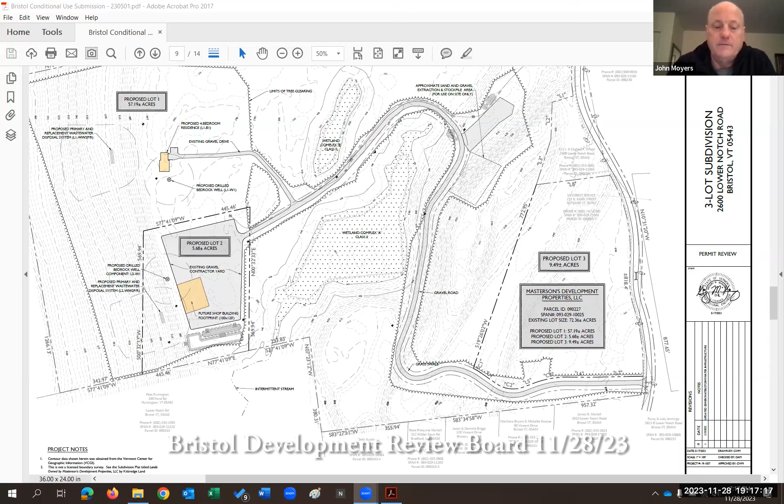So is this a 3 Rod Road? Most of the clearing will actually be within the right of way of the road, but if needed it can extend onto Masterson's property. But not looking south, no.

Well, it's a public highway, there's a town right of way. So you confirmed it's a 3 Rod Road, or are we guessing by default? I haven't confirmed it myself. Okay, that's probably the default. It is. It probably is, but not always.

And did Mr. Dickerson say that 250 feet is, quote, the absolute minimum required for safety? I just want to see if I heard that right. Safe stop distance also, in this case most of the traffic will be exiting and turning right to the south, so really it's the sight distance to the north that we're mostly concerned with.

There's very little traffic turning left and heading north, particularly the heavy vehicles. All the heavy vehicles are going to be traveling south. But did I hear you correctly that 250 feet is the absolute minimum for safety? Yes, thank you. That's the safe stop distance, the absolute minimum, the minimum safe stop distance according to engineering standard. Thank you.

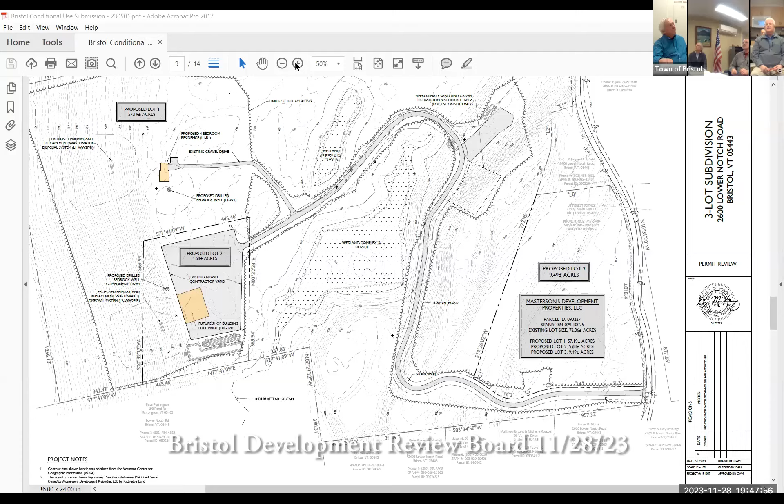But not to the south. I can't, to the north. I believe that we can make that determination, that the clearing required can be accomplished within the town right of way.

So if I'm reading this exhibit right, we've got 818.4 feet of property frontage, and the driveway is pretty darn close to the property line, so you've got more than 390 feet available of property frontage before you get to the northern property line, right?

So whether it's the town right of way or the Masterson land, it's available. Yes. But we don't know that looking south, do we? No, my recollection is that it will be doable, but I can't ascertain that from this exhibit.

226 feet of visibility looking to the south from the driveway, and 150 feet to the north. So testimony from Roger is that 390 feet can be obtained to the north. You need 250 feet for minimum stopping distance, 390 feet for the recommended sight distance. So you need another 24 feet to the south from the driveway for the minimum safe stopping distance.

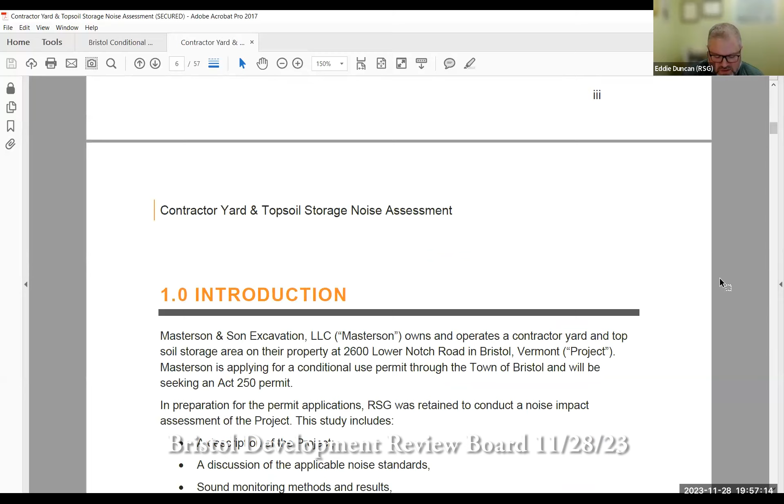Very good. So I'd like to start with section 2 on page 2. If you want to go there, this is a section that provides an overview of the project area and the operations. I'll wait till you get there and then we'll continue. Well, let's stop at this map here on figure 1. This will be a good backdrop for this. So yeah, figure 1 on page 2.

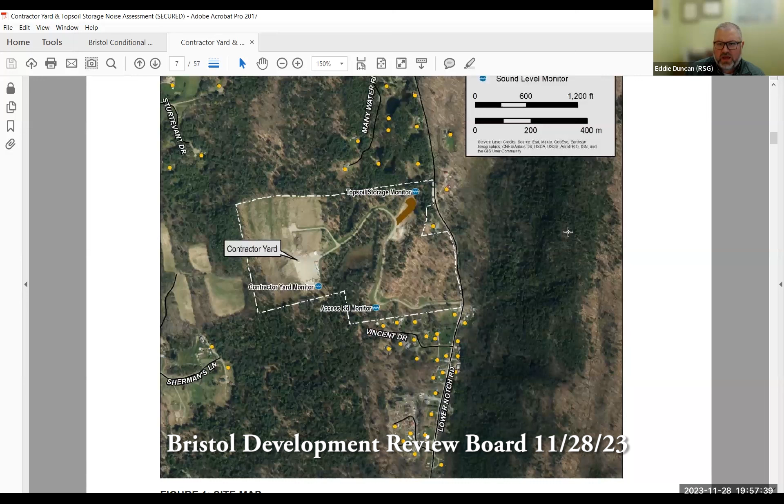So in this figure, we can see the proposed site. We see the property line outlined by the white dash line. We note the location of the contractor yard. The area for topsoil storage is noted by the brown polygon. The access road is clearly visible in the aerial photography.

We also show the location of 3 sound monitors that I'll refer to later in the report. And we can see these orange dots throughout the area — those are all residences identified through the Vermont E911 database, the same residences used in the modeling portion of the study.

So the proposed operation we are considering here in the noise assessment is really 2 separate areas. There's the contractor yard, where the sound is for the most part loading and unloading equipment and vehicles coming and going. In modeling, we modeled just that — vehicles being loaded and unloaded in the contractor yard.

The other part of the proposed operation is the topsoil storage area. It's the same details we had with the traffic study: delivery of approximately 1,000 cubic yards over the period of a few days. As you heard in the traffic testimony, it's a few days over 2 separate weeks during the year. It would also involve processing and screening for approximately a week per year, split between those 2 periods where topsoil is coming in.

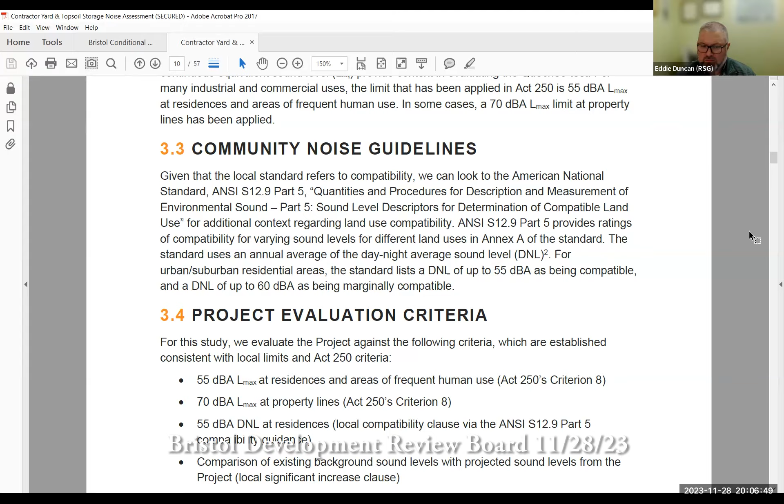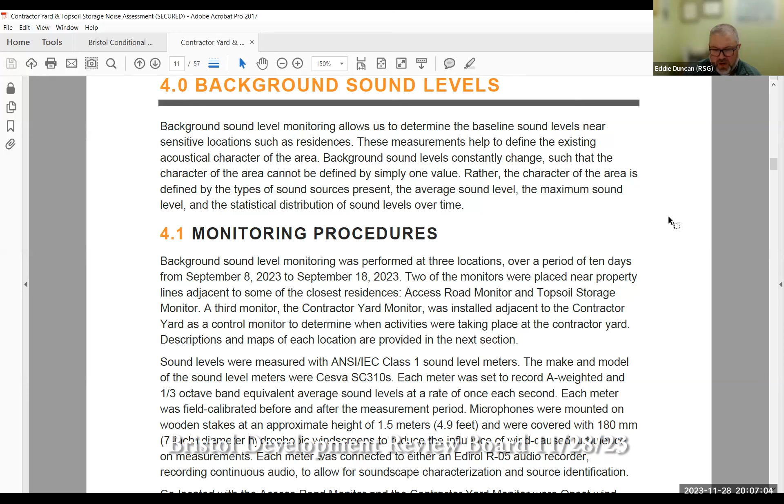So if we could go to section 4, to the monitoring section, we'll talk a little bit about the background sound level monitoring that we did. We conducted approximately 10 days of background sound level monitoring in September of 2023, at 3 locations that we saw on the map in figure 1. Actually, why don't we go back up to the map in figure 1 just to highlight those locations.

Those 3 locations include the topsoil storage monitor, located northeast of the topsoil storage area, between the topsoil storage area and the property line next to the closest residence in that area. Then to the south, there's the access road monitor, located at the corner of the access road just before it turns north on the property, adjacent to the closest property line to the south where the residences are located along Vincent Drive.

And then there's the contractor yard monitor, which is representative of a location set back further from Lower Notch Road than the other two, but it also served as a control monitor. At the time, we weren't sure if there would be activities occurring in the contractor yard or not, but we wanted to make sure that if there were, we were able to quantify that from that monitor to see how it affected the other monitors. We have those three monitors that are reported on in section 4 of the report, so if we could go back down to there.

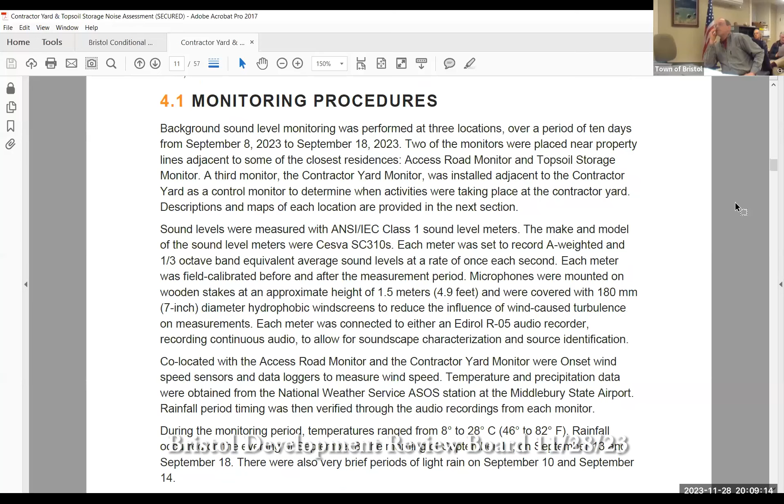Which locations did you measure wind speed? That is at the access road monitor and the contractor yard monitor.

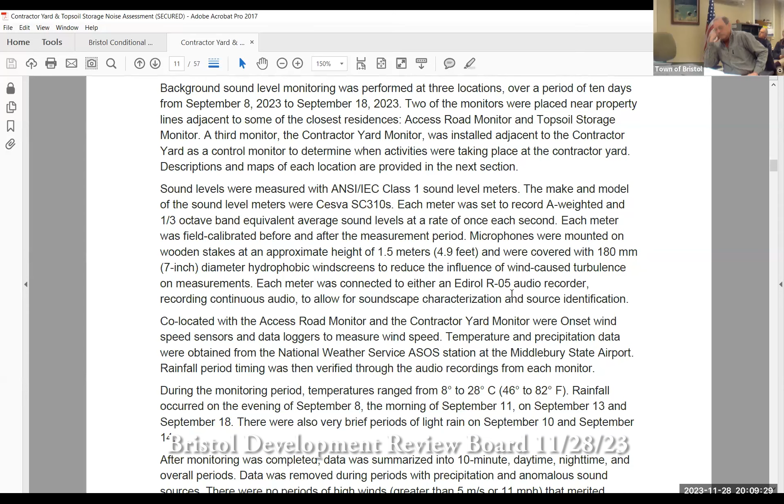Yeah, I see that now in the report. Well, during the monitoring period, we actually ended up not having any periods above 5 meters per second, which is the cutoff for data that should be excluded from the data set. So while we monitored wind speed, it wasn't windy during the monitoring period, so we didn't have to worry about that causing extraneous noise.

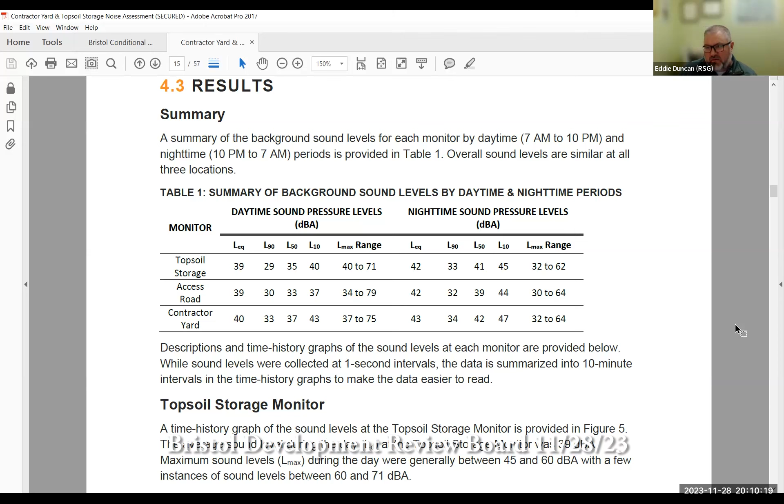So the results are presented in section 4.3 on page 10. It's presented in a few different ways, textually in the paragraphs, but table 1 provides an overall summary of each of those monitors, and we also have a time history graph for each of the monitors. So I'm going to focus on table 1 here, since it's the most easily digestible for all of us.

What we can see from table 1 is that background sound levels are fairly consistent across the entire site. It really doesn't vary that much. You might get a little more sound from vehicle pass-bys down at the access road, and at the topsoil storage monitor where you're closer to Lower Notch Road. But generally speaking, it's very similar across the site. The daytime average sound level was 39 decibels, 40 up at the contractor yard, but you can't hear the difference between 39 and 40. So we're just going to call the background sound level at the site 39.

Eddie, hold up. So this would be a good place, since we have this table in front of us, for you to explain the row of units across the LEQ, L90, L50, L10.

Sure. If anyone wants to take a deeper dive into this in their own time, there's a lot of information in one of the appendices. There's a noise primer, but to give an overview now, the LEQ is the equivalent continuous sound level, which from a layman's perspective you can think of as an average sound level.

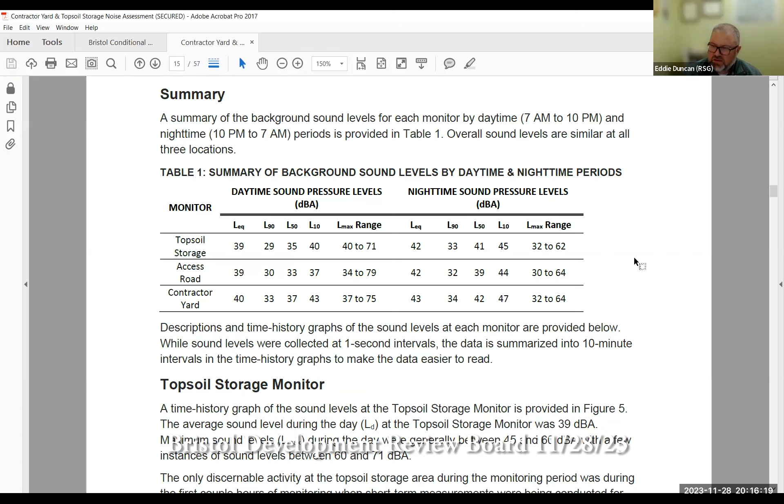So in addition to this background sound level monitoring, we also did tests on the day that we set up the equipment, September 8th. And I think the one that I'd like to highlight here is in the topsoil storage area, the topsoil storage monitor. We had the applicant load and unload material right in that area with a dump truck, a loader, and an excavator operating. And that also included the tailgate hitting on the truck.

And with that, during those operations, the average sound levels at that closest monitor, the topsoil storage monitor, was between 45 and 49 decibels. And the maximum that occurred at that monitor was 63 to 74. And that was due to unloading the material from the dump truck.

So that's the background monitoring. There's more that we could go into if there are questions.

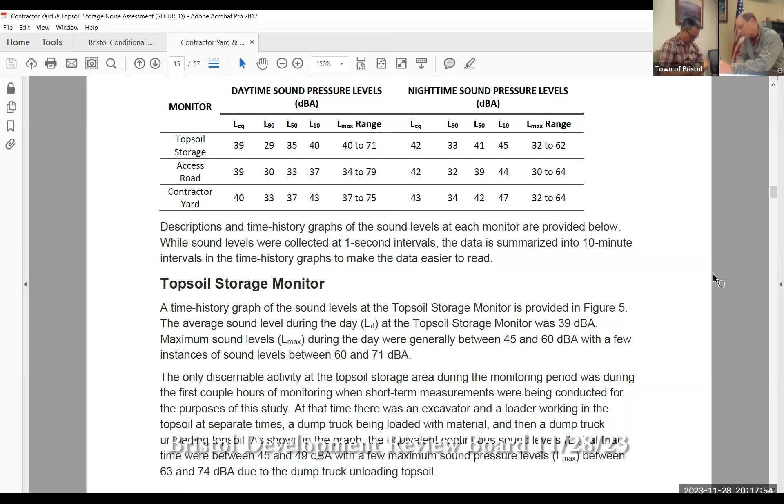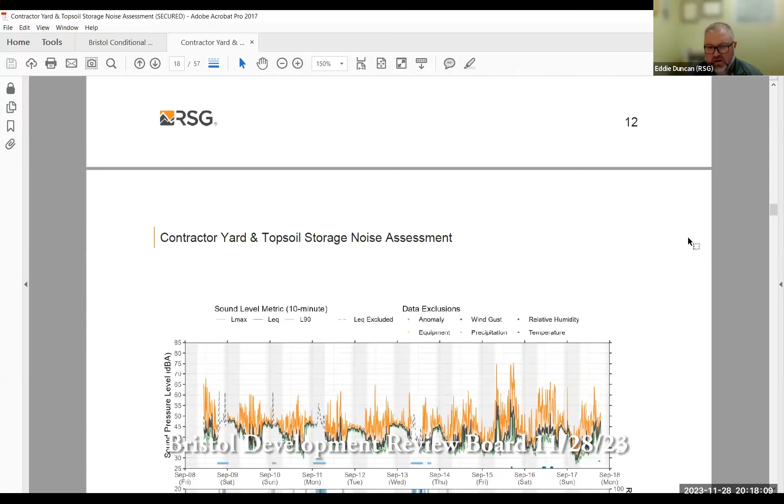So let's go to the following section, section 5. These are time history graphs that we're scrolling past here. So section 5 talks about the projected sound levels from the proposed site. So we took those tests that we did at the site and we quantified the sound emissions of those operations. And then what we're able to do is build a 3-dimensional computer model, and we put those sound emissions into that model.

That computer model uses a software package called CadnaA. The important part about that, though, is that it implements an international standard. The international standard is ISO 9613-2. This is an internationally accepted acoustical model for calculating sound propagation outdoors. It's used across the state by other local boards, Act 250 district commissions, the environmental court, the Supreme Court has even relied upon it, and it's used all around the United States.

And so that's the model that we use to calculate sound emissions and take those sound emissions and essentially propagate or spread them throughout the surrounding area so that we could calculate what the sound level would be at all of the property lines and all of the nearby residences. And so that's what this does. And we did that for a number of scenarios, which are on the next page here.

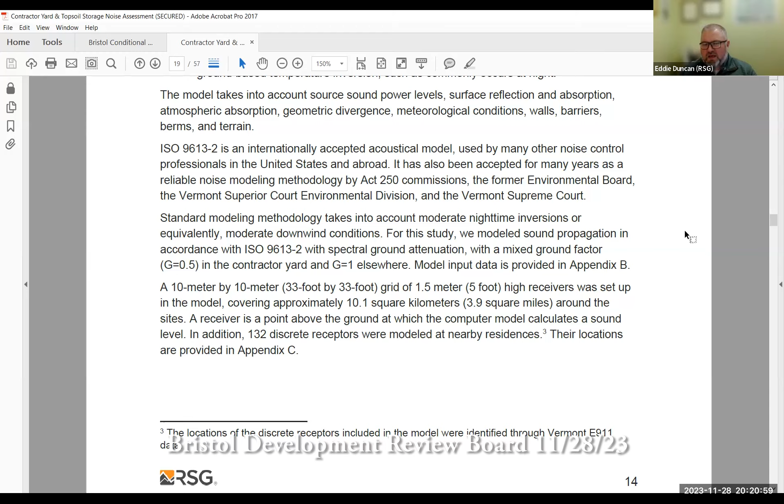There's more model input information provided in Appendix B. What we ended up doing is calculating the sound level throughout the project area over about a 4 square mile area. We included 132 residences in the model, from the Vermont E911 database. We ended up modeling 8 different scenarios, shown here on page 15, section 5.2.

These scenarios are broken down by area. Scenario 1 is up in the contractor yard. Scenarios 2 through 5 are in the topsoil area. And scenarios 6 through 8 are on the access road.

Scenario 1 is unloading and loading of equipment from a trailer in the contractor yard. It's literally the cover photo to the entire report, a tracked excavator coming off of a trailer and then pulling back up onto the trailer. So that's the sound level from scenario 1.

Scenario 2 is unloading a dump truck in the topsoil storage area, which includes using the tailgate to hit the truck bed. The material was topsoil.

Scenario 3 is screening topsoil in the topsoil storage area. Scenario 4 is loading topsoil into a dump truck with a loader at the topsoil storage area. Scenario 5 is the same as scenario 4, except it's using an excavator to do the loading instead of a loader.

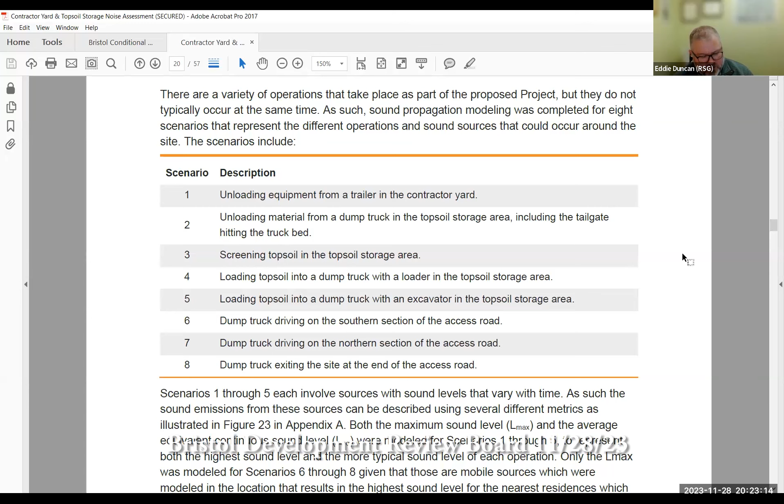So those are the scenarios that we modeled. The results are provided in section 5.3, and we present them in a few different formats. One is map formats that show sound level isolines. Let's look at an example of that real quick on the following page.

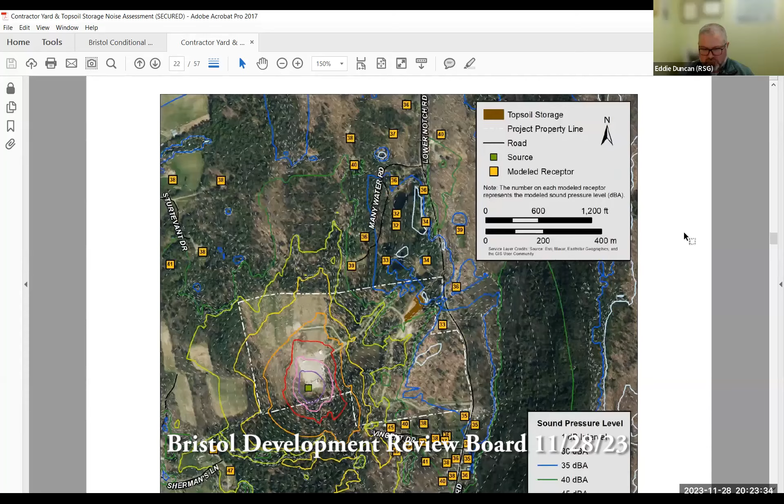So you want figure 8, Eddie? Yes, figure 8. This is just one of multiple maps for each of those scenarios. The colored lines represent sound level, going from dark purple near the source, near the middle of the map, out to dark and light blue colors on the outside of the map. The purple line near the center represents 70 decibels, all the way out to the light blue line on the outside representing 30 decibels.

There are a variety of dashed gray lines on the map, representing 1 decibel intervals. So you can literally look anywhere on the map to see what the sound level is in a certain area. In addition to those lines, we also have orange boxes over top of each of the residential locations, with a number on top of each box. That number is the projected sound level at those locations, so you don't have to figure it out from the ISO lines—you can just look at those boxes.

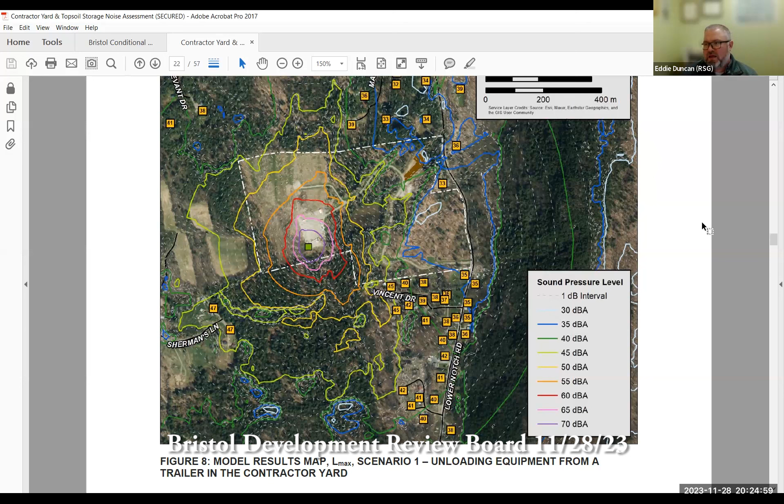For each of these scenarios, we modeled both the maximum sound level, shown here in figure 8, and the LEQ, or average sound level, which is in figure 9 below, and in other figures for other scenarios as well.

So the number in the boxes for the residences—is that L max? It depends on which map you're looking at. In figure 8, the caption says this is the L max, so all of those numbers in the boxes are the maximum sound levels for that scenario, projected at the individual residences.

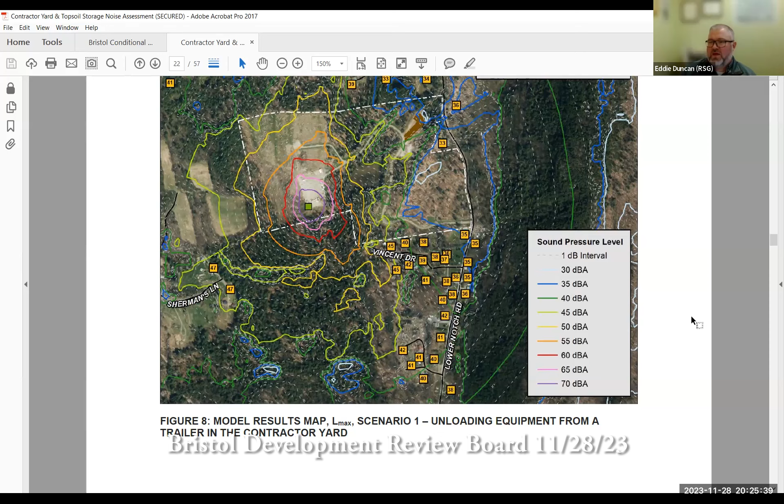And then in figure 9, the caption says that is the LEQ—again, like the average sound level. So the boxes in that map are representing the LEQ, or the average.

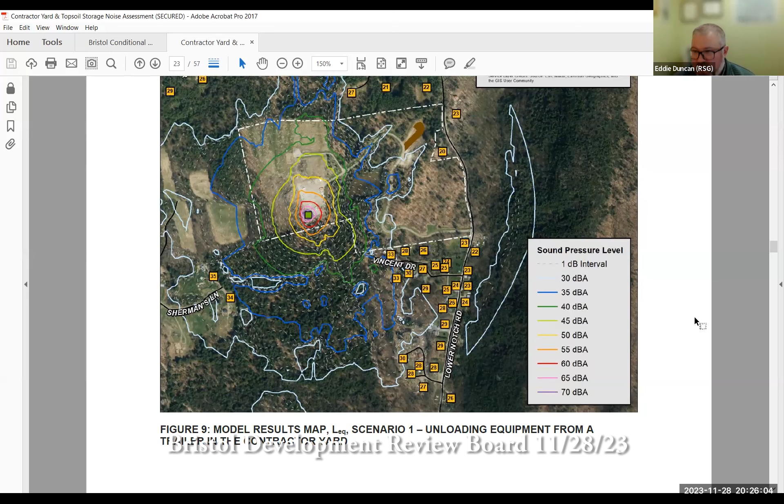In addition to this format for the model results, we also provide all the model results for all scenarios in tabular format in the last appendix of the report, and those can be looked up by street address. So if someone says, I live at 123 Lower Notch Road, you can look up the sound levels at 123 Lower Notch Road for all of these different scenarios.

Okay, so that's Appendix C. That starts on page 48, through 52. Okay, thank you.

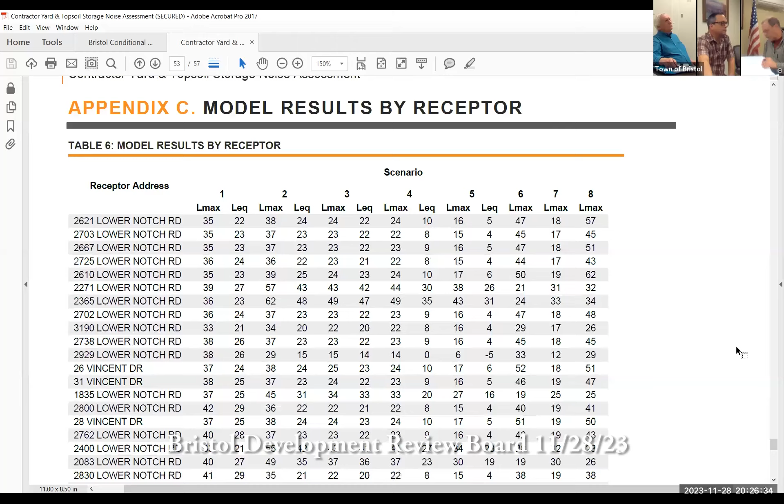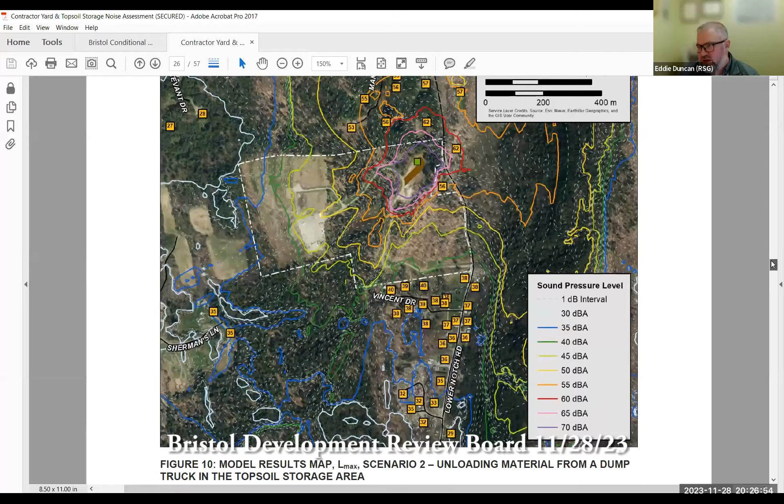So briefly, rather than go through each map, we also provide a textual description for each scenario. What I'd like to do is verbally walk you through each scenario and talk about the highest sound level from each, focusing in on that worst case.

So if we go to scenario 1, on page 16, the highest sound levels occur at Sherman's Lane, which is to the southwest of the site. In that case, the maximum sound level is 47 decibels and the LEQ is 35 decibels.

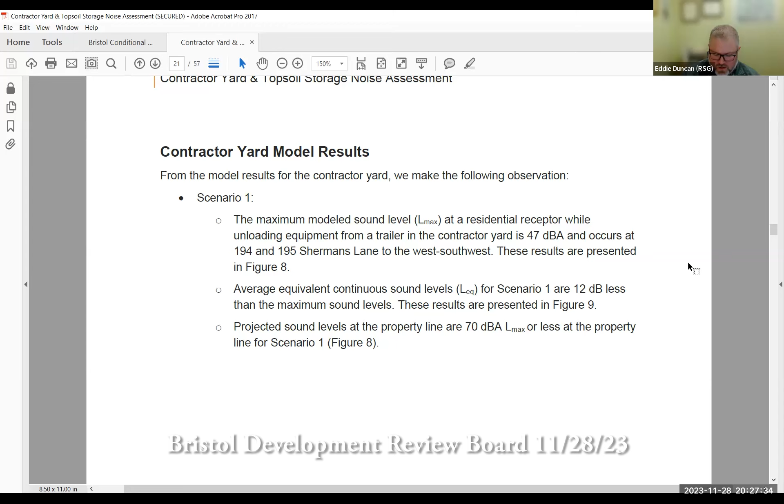For scenario 2, on page 19, which is unloading topsoil in the topsoil storage area, the maximum sound level occurs at two different residences, 2262 and 2365 Lower Notch Road. Those are the closest residences to the north and to the east of the topsoil storage area. In that case, the maximum sound level is 62, and the LEQ, or average sound level during those operations, is 48.

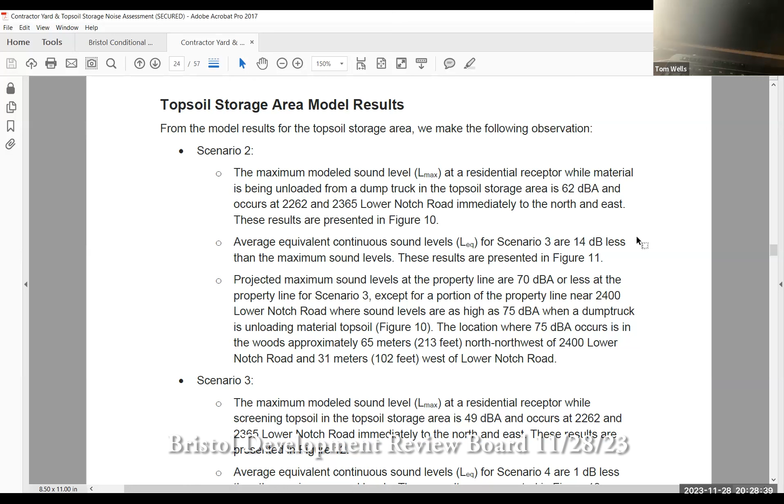Question: did that scenario include the banging of the door when it closes, as I recollect? Yes, it did. So presumably that is the single highest event in the sound. That's correct, that's the loudest source in the model. Got it, thanks, that was my question too.

Scenario 3 is screening in the topsoil storage area, and it happens at the same two residences we just referenced. In this case, the maximum is 49 and the average is 48, because the sound levels from the screener are fairly constant, particularly when you're screening topsoil.

Scenario 4 is loading a dump truck with a loader with topsoil. Again, the highest sound levels occur at those same two residences near the topsoil storage area, and in that case the maximum is 51 and the average is 37.

Scenario 5 is the same as scenario 4, except we're using an excavator to load the dump truck. In that case, the maximum sound level is 44 and the average is 33 at the worst case location, which again is 2262 Lower Notch Road.

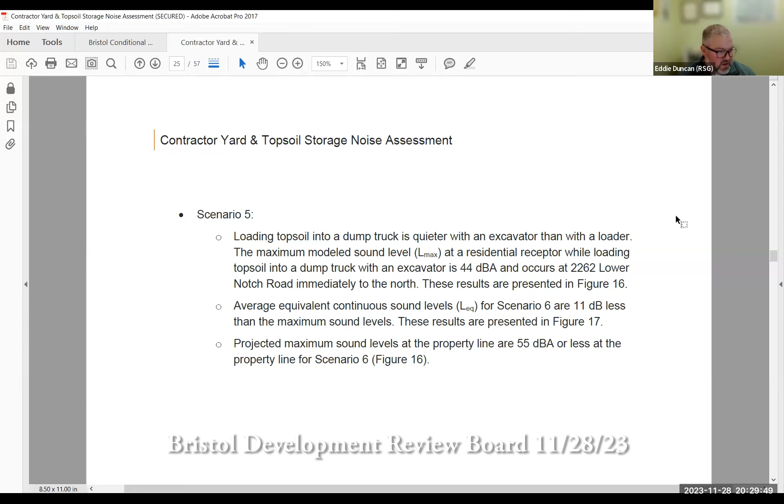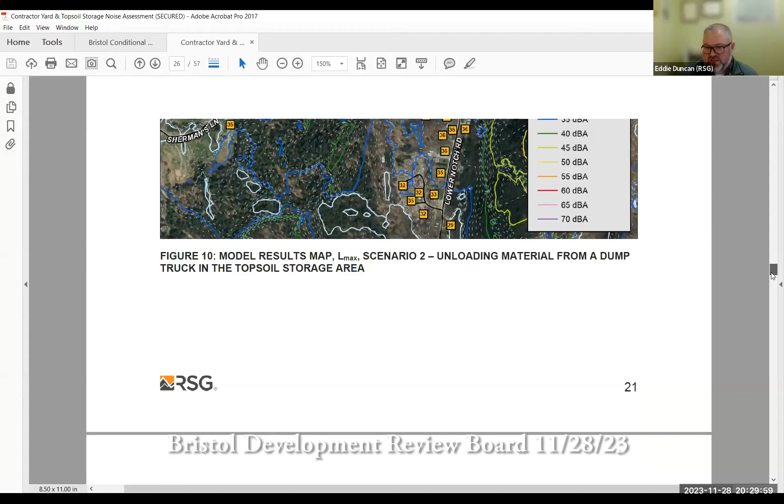If we scroll down to page 29, we have scenarios 6, 7, and 8, which are the truck on the access road. The truck is modeled at the worst case locations for the respective closest residences, so we don't have the LEQ or average sound level, just the maximum shown here. The maximum sound level when a truck is on the southern access drive is at 98 Vincent Drive, at 61 decibels. For scenario 7, when a truck is on the northern section of the road heading up to the contractor yard, the maximum sound level would occur at 308 Many Waters Road, at 43 decibels. For scenario 8, when a truck is pulling out onto Lower Notch Road, the highest sound level occurs at 2610 Lower Notch Road, at 62 decibels.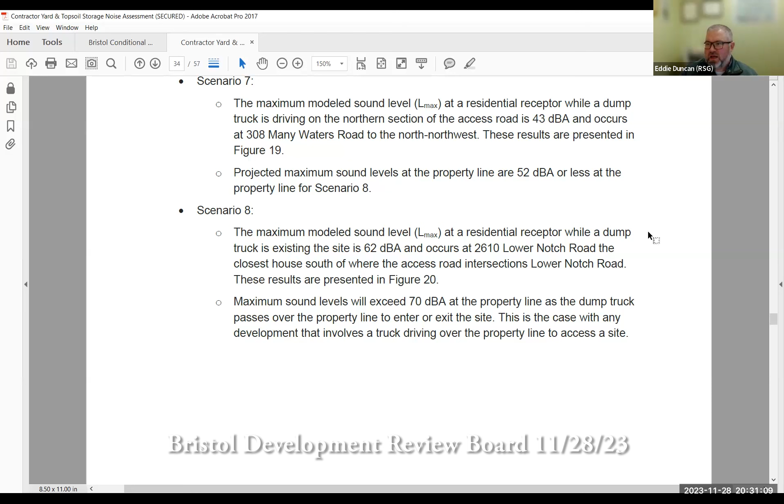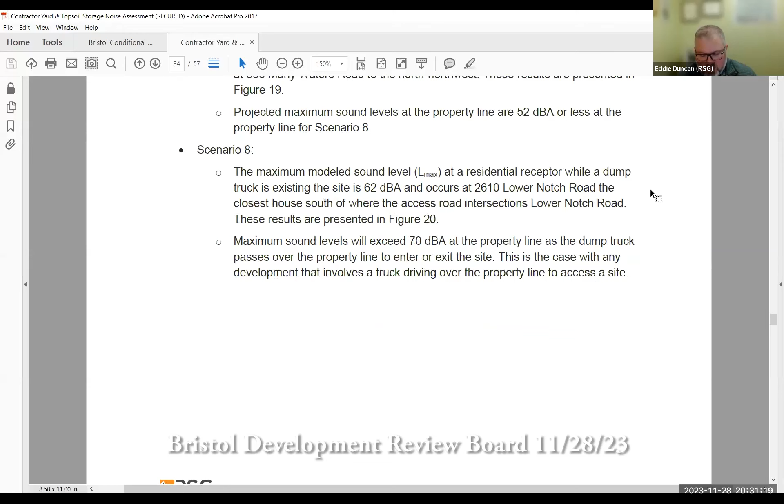So those are the maximum and average sound levels from these various scenarios. What we did then is take those results and calculate the day-night level so we have something to compare to that ANSI standard we were talking about earlier. We also calculated the existing day-night level without the operation, so we could compare the existing DNL to the potential future DNL. On pages 32 and 33 we talk about this analysis.

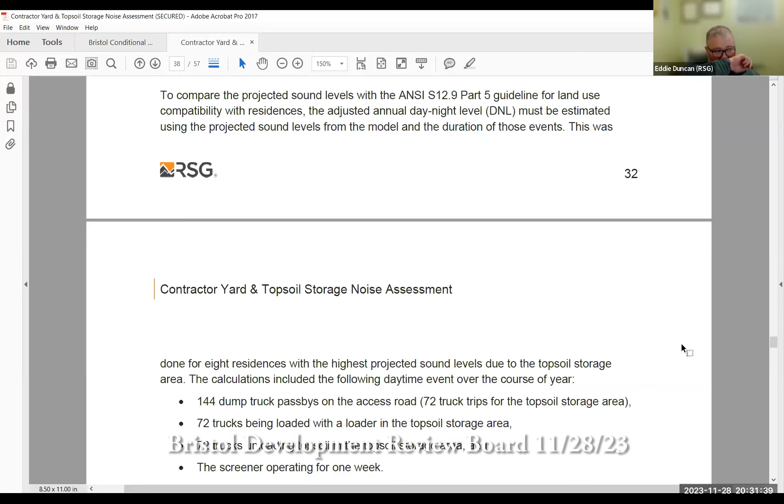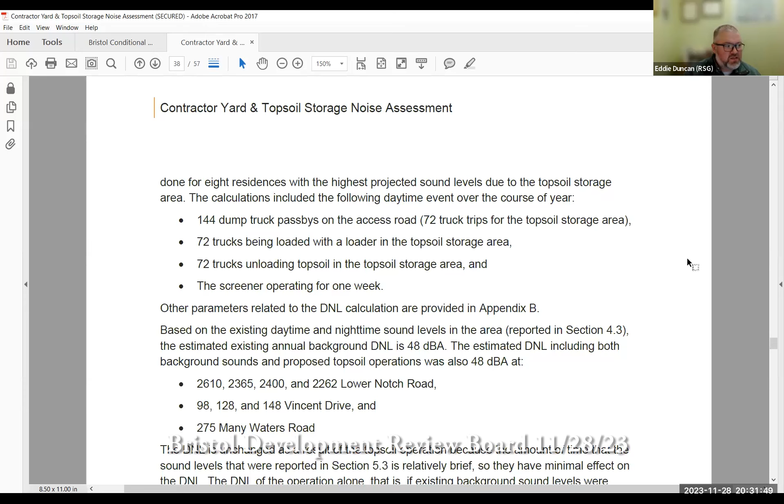And this includes 72 truck trips to the storage area, 72 trucks being loaded with material, 72 trucks being unloaded with material, and a screener operating for one week. With all of that operating, the future DNL was 48 decibels, but the existing DNL is 48 as well.

What this shows is that the DNL doesn't actually change as a result of the operation. The reason for that is the infrequency of the events at the site. Much of the time, much of the year, it's just a storage area for topsoil. So when we take into account these times of heavier usage, it doesn't change the DNL, because those are only occurring fairly infrequently relative to the time period over which the DNL is calculated.

In fact, the DNL of just the operation itself, if we ignore background sound levels, is between 10 and 28 decibels. That's for the loading and unloading of the trucks, the truck pass-bys, the loading, the unloading, and the screener. If we take all of that into account, the annual DNL, which is what the ANSI standard uses, of just the operation is 10 to 28 decibels.

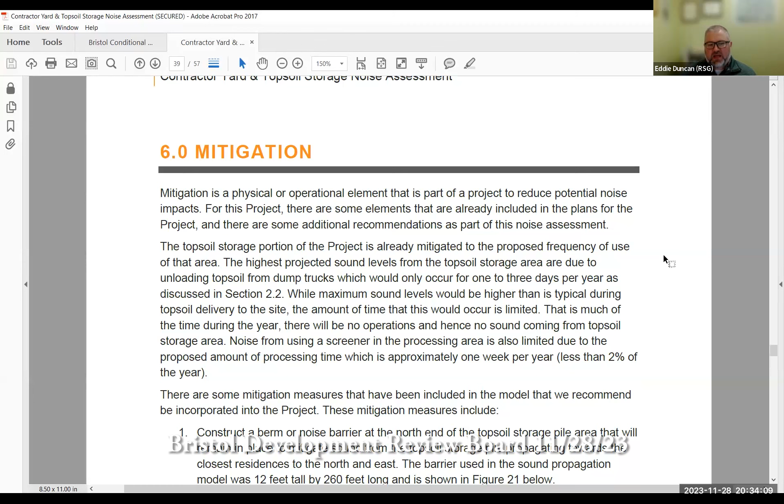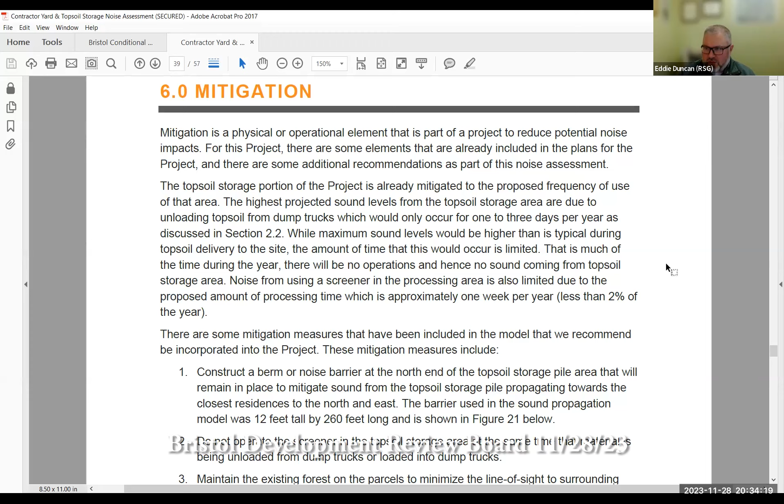I'd like to go to the next section, which is section 6, and that is mitigation. We have a number of mitigation recommendations that are listed here, and we also talk about the mitigation that's incorporated into the project. I'm not going to go through each one, but I'm going to highlight some of the key ones here.

The first is what's already essentially incorporated into the project, and that is the proposed frequency of use at the site is relatively low. Granted, on those maximum days that we talked about earlier during the traffic study, it could be more intensive on those days, but outside of those days, the actual frequency of use at the site is relatively low, which mitigates the sound levels throughout the year.

We also have recommended that a berm or noise barrier be constructed at the north end of the topsoil storage pile area. We give details in item 1 on page 33 here about that noise barrier. It's also shown in figure 21 on the following page. That will help reduce sound levels to the north and to the east.

Two more mitigation measures. Mr. Duncan, do you have any sense of, when you say help reduce it, how many decibels it will reduce it, or any sense of quantifying that?

Well, it's quantified in the noise model. So the results that we've been talking about incorporate that berm barrier into the model. So the numbers, you don't have to do the math, the math's already been done. But which table do we look at to see the model effect of the berm?

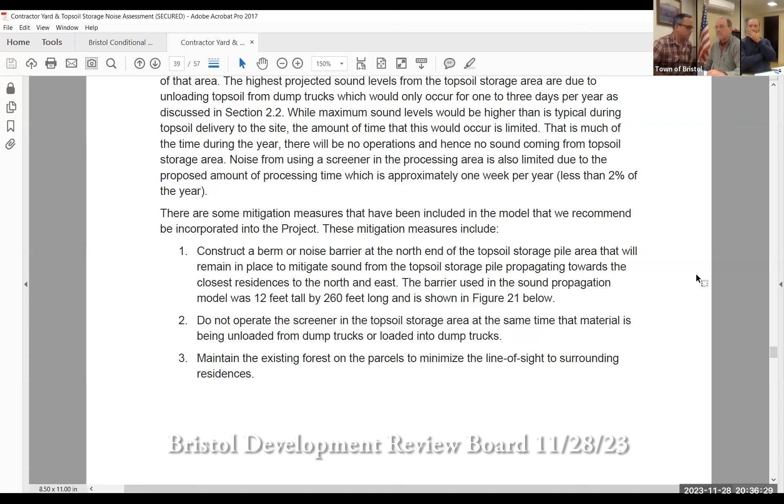We've also said to prevent simultaneous operation of the screener while loading and unloading material. So we understand that the screening may happen in similar time periods to the unloading of material, but we've recommended that the screener not be actively operating during unloading and loading.

So those sound levels from those two operations would not be additive. I want to jump back to the barrier berm a bit. What material were you considering that to be composed out of? And then what's the cover? Is it seeded, grassed? Is it just sand and rock, or what?

Yeah, so it just has to be an earthen berm. It could be rock that's going to stay there and not be moved, it could be a seeded earthen berm. From a noise standpoint, if it's blocking that line of sight up to the 12 feet that we've talked about, it will effectively act the same. Where we might have a little more specification is if we're talking about a noise barrier. So an earthen berm will mitigate it, whether it's made of rock or whether it's made of grass and soil, that type of thing. If we're talking about a noise barrier, the specification would be that the noise barrier weigh at least 4 pounds per square foot. That's a surface weight.

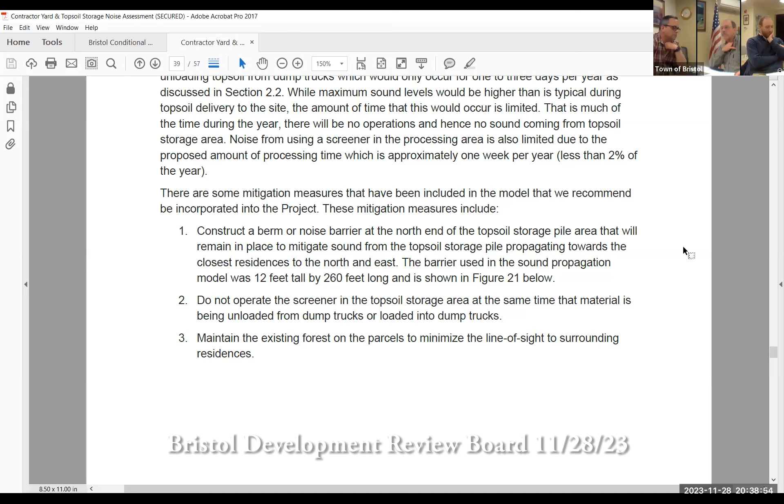And it could be a combination of the two. You could have a 10-foot high berm and then a 2-foot high wall that goes along the berm. That would be just as effective. Aren't we always talking about the berm as a noise barrier here? Yes, but when we're talking about it, a berm and a barrier have the same effect from a noise standpoint. Typically when we talk about a barrier, we mean a wall or concrete blocks, while the berm has a wider footprint because it's made of earthen material. But the effect is the same on the model. Yep, got it.

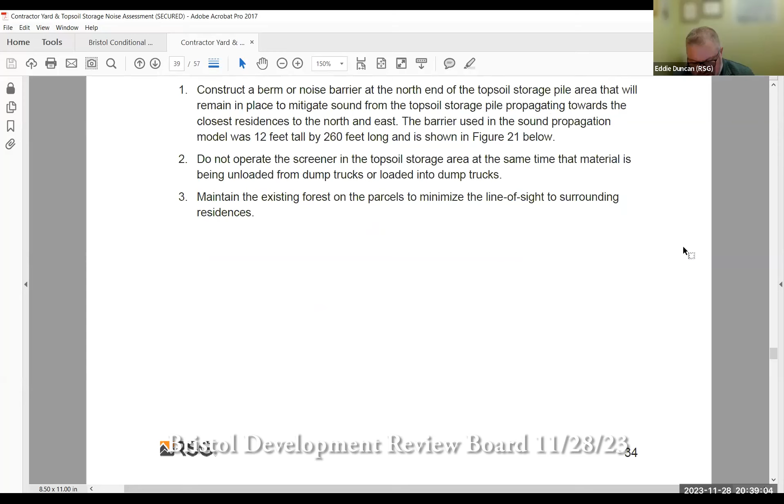And then the last mitigation measure. I have a quick question. If it's the berm we're talking about, as opposed to a separate barrier, would the berm be 12 feet tall by 260 feet long? Yes, the berm would be 12 feet tall and 260 feet long.

And how wide across does a 12-foot berm have to be to stand up? What's its base width? I think it would have to be engineered. That can vary, so it depends on what would come from the engineering for that. It could be a 2-to-1 ratio, it could be a 3-to-1 ratio. That's from a noise standpoint, that's not for me to make that call. Thank you.

No, I would estimate probably 25 feet wide, with a 2-on-1 slope. So it's pointy at the top, not flat. That would figure just a 1 foot flat area if you did a 2-on-1 slope.

That sounds like a whole separate impact. That's quite a large structure. It has visual impact too, and construction impact. I don't see, is that part of this application now? Well, when this area was cleared, Josh pushed, when he stumped the property, a lot of this material was moved into the area where this berm is proposed. I don't have measurements on what's out there currently, but I would guess not much more has to be done to construct a berm to these specifications.

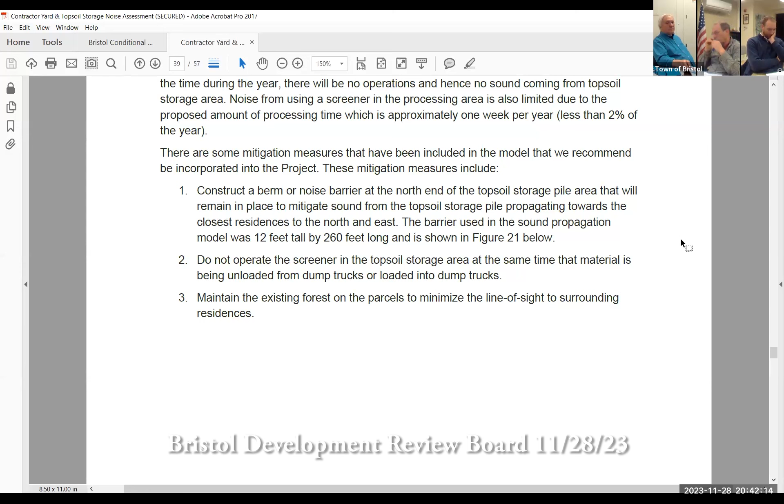So there are a number of other mitigation measures here that I'm happy to answer questions about, but a lot of them are just fairly standard things, like maintaining the existing forest on the parcel to help block line of sight, things of that nature.

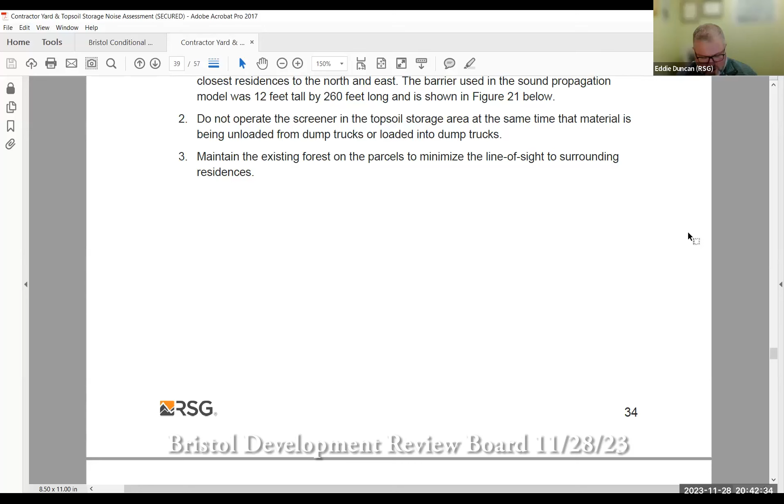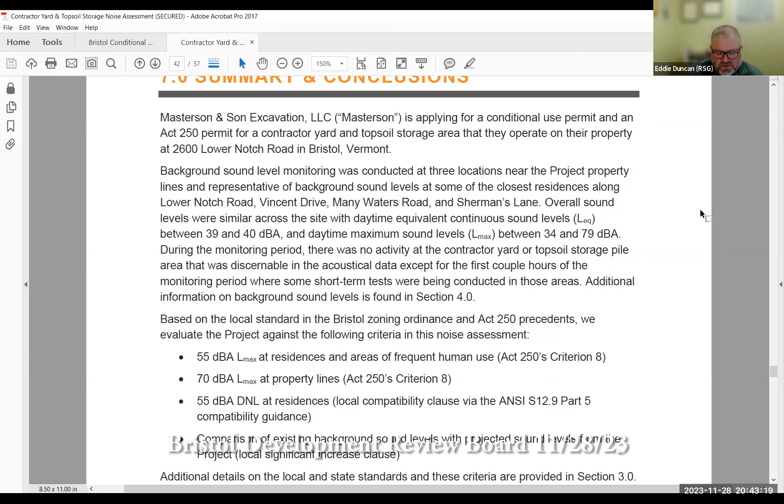So if we could go to the next section, section 7, we get to our conclusions. I think the key things to highlight here are that on average, parts of the operation like loading and unloading equipment and loading topsoil in trucks produce sound levels comparable to existing daytime sound levels. Those sources are relatively not loud. It's activities that cause higher sound levels, such as screening and unloading topsoil, that are on average 9 decibels higher than existing sound levels, with maximum sound levels similar to other maximums that occur at the site, but occurring with greater frequency during the shorter time frame that those events happen.

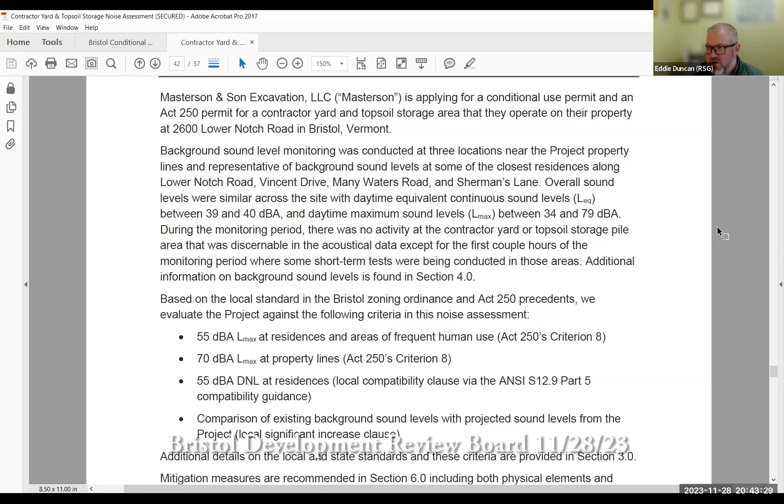And then finally, the DNL, which we talked about, remains unchanged. It's 48 now, and it's 48 with the proposed operation, because of the infrequency of those operations.

And that's what I have for a direct presentation, but I'm happy to answer any questions about what's in the noise study here. Okay, thanks, Eddie.

Let's start with questions from the board, if any, for Eddie. Yep, and then I have one.

I know I'm focused on one little item, but since it is the single loudest sound that comes off the site, as a noise expert, or maybe it's really a trucking expert, is there any way to mitigate the sound of the dump truck tailgate closing, it coming back down? You don't have a damper or anything that's available, correct?

Josh says no. Oh, tailgate's tailgate. Yeah, no, I get it. I'm no kind of expert on tailgates, and I wondered if there was any way to mitigate that, to prevent that from happening, since that is the one time when you're starting, you create some fairly loud sound off site.

The best way to mitigate it is to control the level at which it's hitting the truck bed. Now, if you've got dry material, it would not need to hit the truck bed as hard because it would come out of the truck bed a little more easily. If you have wet material, then it needs to hit a little harder in order to get material from the truck.

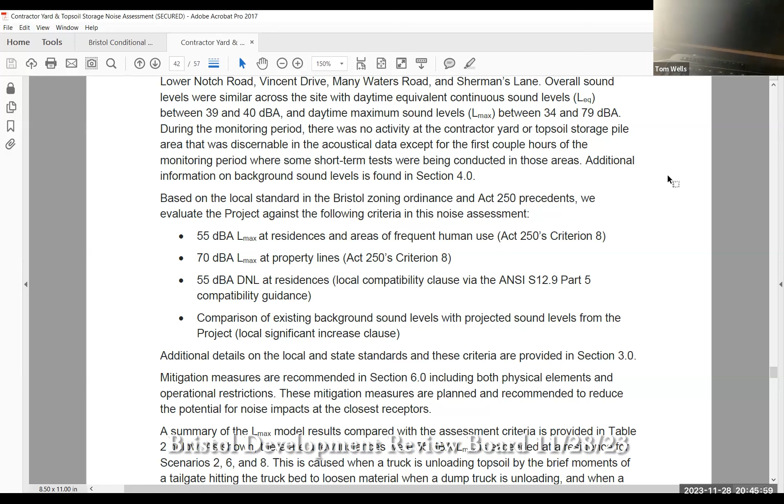Yep. Any other questions from the board? John? Yeah, did you take into account backup beepers in any of your analysis? Yeah, there were backup beepers occurring during the tests we were doing. Generally, the backup beepers are quieter than those other sources that we're modeling. So the loading of material into the dump truck and also unloading material from a dump truck, those are louder sources. So we're focusing on those louder sources.

We do, however, recommend in the mitigation section above that alternative backup alarms be used for the on-site equipment. So a loader and an excavator, that they be outfitted with - there's a variety of options, but one example would be a broadband backup alarm that makes a sound like white noise, like shh, shh, as opposed to a pure tone.

We've had testimony that those are not applicable to lots of kinds of equipment. Is that your experience? Or are they widely applicable to any equipment? I've seen them used on excavators and loaders throughout the state. I can't say specifically to the excavators and loaders here, but they're fairly standard.

I would imagine that it's a fairly easy switch out. Do you have any guidance to give us on that part, Josh?

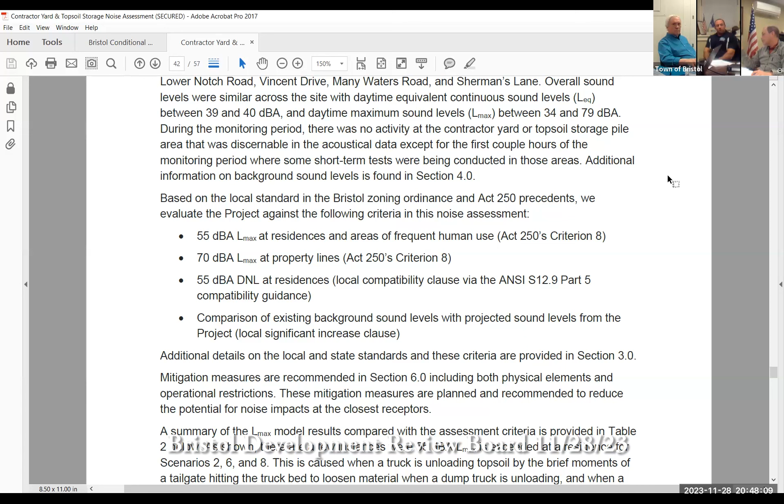In the application, the applicant noted they were installing essentially a kill switch or something like that for backup beepers, but that's not really OSHA qualified, is it? You can't really do that. Is that correct? Correct. Thank you.

This is a comment, not so much for the expert. Thank you for running through all that. It's a lot of numbers, and these sound noise models and stuff are a little numbing to the layperson like myself, but I hear all the numbers, the monitor reports and the test reports. But I see the words in our zoning regulations - significant increase and incompatible. After all this testimony we've heard, I've heard a lot of testimony from neighbors who have heard noises that they considered to represent both significant increase and incompatible with their established use of the areas. I just note that for context.

Thanks. Any other questions from the board? Okay, Jim, do you have some questions? I have a lot of questions.

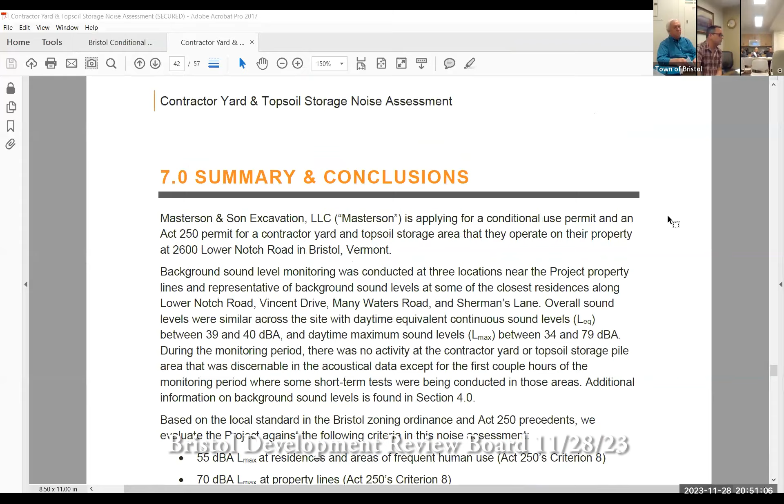So I'd like to start with page 44 of your report, Eddie. Would you like this on the screen as we go along, Mr. Dumont? Sure, it's helpful. Page 44, you said? Yes. There we go, bottom half of the page, bottom paragraph, midway through it. This discussion is about

sound levels from multiple sources. And the bottom paragraph says, in the middle, that the loudest source in any situation always dominates the total sound level. You see that? Yes, it's the first... third. Got it, I got it now.

So Eddie, if background noise, pre-existing background noise, is louder than the new noise, say, of Mr. Masterson's operation, the background noise will dominate the new noise, right?

No, so you read that sentence out of context. If we could fill that context in, that would inform the discussion a little bit. Okay, but I'll explain. That sentence is referring to the previous sentence, which says if two sound sources differ individually by 10 decibels, then the louder of those two is generating 10 times more sound. This means that the loudest source in any situation dominates the total sound level. So I think you have to take that second sentence in the context of two sources where one is around 10 decibels louder than another.

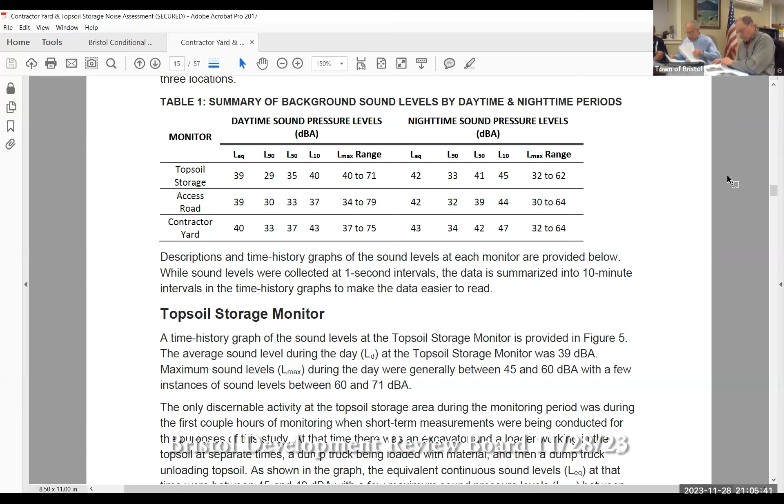All right, well, let's go to figure 9 on page 18. Bearing in mind that the background is 39 or 40, figure 9, page 18, the yellow line is 50 and the orange line is 55 decibels, right? Yes, that's correct. And outside the property line, we've got LEQ of 55 and 50, correct?

That's correct. And that's more than 10 LEQ above 39, is it not? So in the middle of this forest that you're referring to, it is more than 10. At all residences, it is less than 10. I didn't ask you about residences, I'm asking about property. Who owns the property that will be affected, that'll be 55 dBA, which is more than twice as loud as background? I don't know.

No, it won't. 55 as compared to 39. Every increase of 10 decibels is a doubling of the noise, correct? It's a perceived doubling of loudness. Right, so the difference between 55 and 39 is 16. So that's more than a perceived doubling, is it not? It's more than a perceived doubling of loudness in this forested area here. Yes.

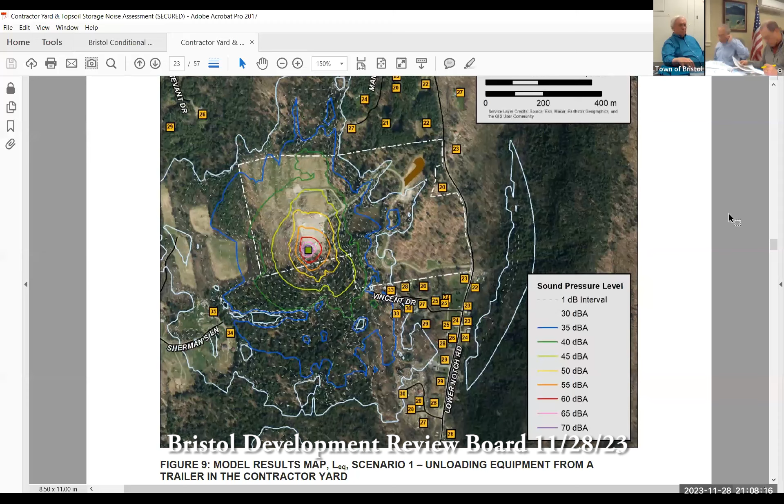Let's look at page 4 of your report. 4? 4, section 3.1, local standards. Hold on.

Okay, this is the quote from the Bristol ordinance that you and Mr. Brown were discussing. Does this just say that no noise which is excessive at residences is prohibited? Or does it talk about at the property line? It mentions property line, and it says excessive at property line, and represents a significant increase in noise levels in the vicinity of the development. It's not, the significant increase does not specifically reference the property line. Excessive is what is specifically referencing the property line.

And so if we are making the argument on figure 9 that 55 decibels would be considered excessive at the property line, to be clear, 55 decibels is at the lower end of conversation. By that argument, one would say that someone having a conversation on the property line would be excessive. And I do not think having a conversation would cause excessive noise.

I thought you agreed with me that a decibel level increase of 10 is perceived as a doubling of loudness, correct? Yes. Okay, and are you suggesting that the noise of a dump truck gate swinging shut, or the noise of a dump truck driving, is like a conversation? They have the same kind of annoyance impact on neighbors.

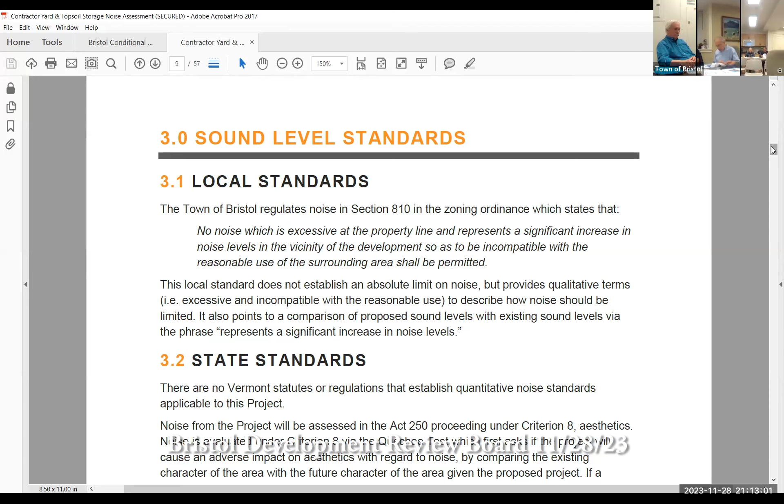Okay, we've looked at figure 9, which shows 55 and 50 decibels across the property line. Figure 9 on page 18, we've been talking about that one. Make it there. All right, I'm there.

And just so the record is clear, 50 decibels is the yellow line, 55 is the orange line, correct? That's correct. And 45 decibels is a green line? It is a light green line. So a light green line of 45 decibels as compared to background is a 6 decibel increase, correct? Approximately 6 decibels, yes.

So 10 decibels is perceived as doubling. What is a 6 decibel increase perceived as? 6 decibels is generally referred to as clearly noticeable. Now, it's similar to the Bristol town ordinance. These are some qualitative terms, but generally 6 decibels is considered clearly noticeable.

Thank you. So let's go to, while we're on that, less than 3 is not noticeable. So if we're talking 40 and 42, you can't hear that difference.

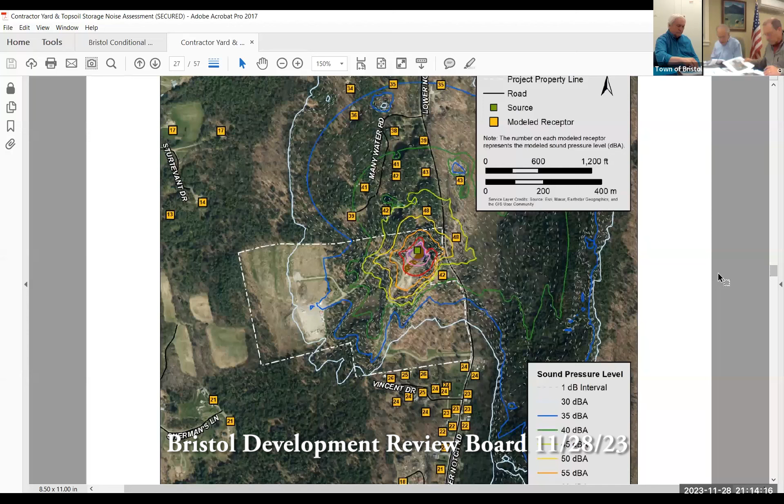Thank you. Let's look at figure number 11 on page 22. This is unloading material from a dump truck in the topsoil storage area. Figure 11, you said? Figure 11, yes. Page 22. Just making sure I had the right one. I'm there.

Does this show at the crossing the property line on the north side, noise contour lines of 50 decibels and 45 decibels? Yes.

And you agree again that the 50 decibel modeling result is more than 10 decibels above background, correct? It's more than 10 decibels above the daytime background. That's the average over the course of the entire day. There will be times where the background sound level would be greater than or less than that value, but if we're looking at the overall daytime value, yes, it's more than 10.

Now let's talk about something that I think is really important that you haven't talked about yet, or just mentioned in passing. If I'm hearing noise that's 10 decibels above background for 10 minutes a day, is that going to have a different impact on me than if I hear it for 10 minutes a day at 8 o'clock, 10 minutes a day at 8:30, 10 minutes a day at 9 o'clock, 10 minutes again at 9:30, 10 minutes again at 11, 10 minutes at noon, 10 minutes at 1, 10 minutes at 1:30, 10 minutes at 2, and so on? Or is it all the same to you?

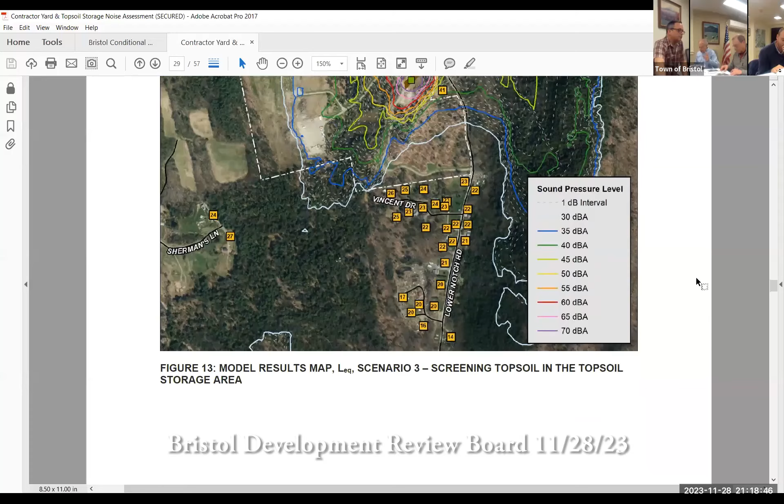That's unloading. Now let's look at the next one, figure 13, which is screening topsoil. Again, this is proposed to be just in two discrete time periods. Figure 13, page 24.

Again, we have the yellow line, which is 50 decibels, extending over the border onto the neighboring property, correct? Yes. 50 decibels being 5 decibels less than the lower end of typical conversation.

Is conversation generally a voluntary event? Well, it depends. I'm not volunteering right now. Say tonight wasn't. In whose house? Yeah, in whose house? You agree? I mean, sometimes it is and sometimes it isn't. If that's a serious question, and I don't mean to downplay it, I'm just saying I would agree that sometimes it's voluntary and sometimes it's not.

Now, if we look at the next figure, figure 15, on page 26.

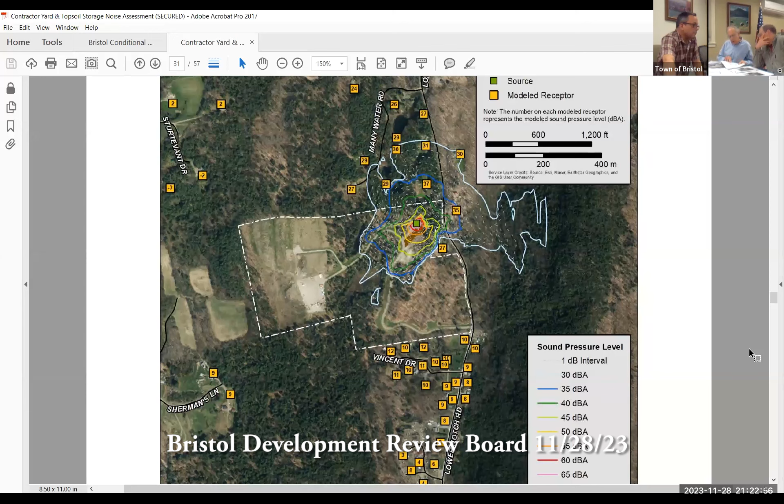Well, let's turn to that figure. I believe where you're ending up is figures 5 and 6 on pages 11 and 12. Is that right?

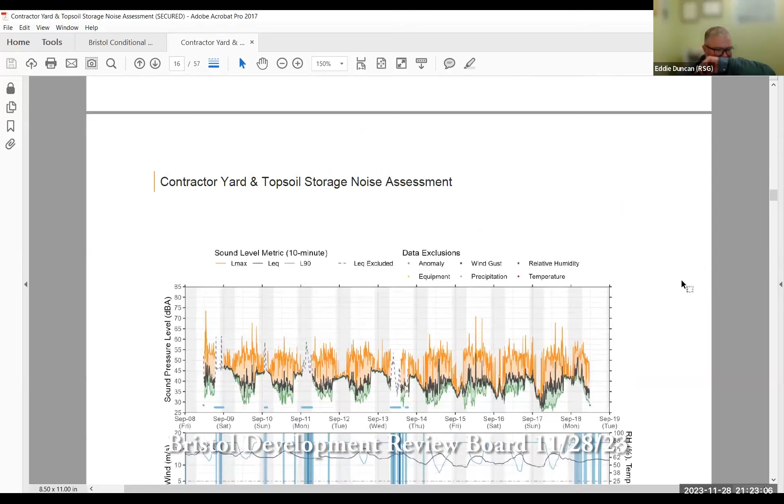Will this help us answer that? No, it won't. Do you have anywhere else you would point us to? No, we have not differentiated between biogenic, geophonic, and anthropogenic sound within this report.

Here's an anthropogenic sound - we're hearing a fire engine go by. Actually, rescue squad. Otherwise Chris would be gone. Oh, all right, hopefully you won't get called next. I already went out once today to put out a fire, so it's all good.

Why don't you explain what figure 5 and figure 6 are for a minute? Sure. Figure 5 and figure 6 are the monitoring results over time. We usually refer to them as time history graphs. There are actually two graphs in each of these figures. The top graph is the graph of sound pressure level, and the bottom graph shows a variety of environmental and weather conditions.

I'll focus on the top graph for now. The vertical axis is sound pressure level, ranging from 25 to 85 decibels. The horizontal axis is time, going from September 8th through September 18th, which is on the far right side of the graph.

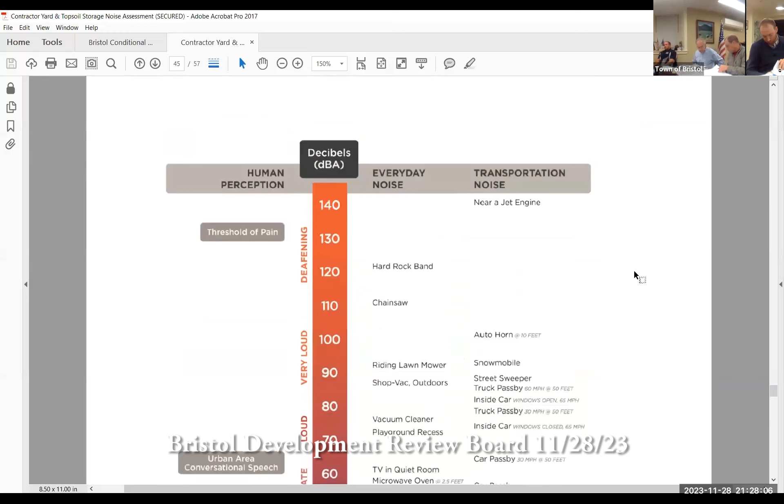Let's pursue this a little bit longer. If we turn to the question of biogenic noise versus man-made noise and how annoying they may be, let's turn to page 40 of your report, which is part of the primer. You write here that a field with insects can generate noise over 50 decibels—looks like the low 50s, 52, 53 decibels, correct?

Yes, a field of insects could be about 50 decibels. Of course, it depends on what field and what insects. This is generally meant to be a graph to introduce people to the concepts of sound levels and different types of sources.

If an area has a field with insects in it, are you saying that loud noise, for example from loading a truck, at the same level of noise, would not be annoying? Same decibels would not be annoying because the field with insects is already 50 decibels? So the truck that's 50 decibels won't be annoying—is that what you're saying? No, as I've said previously, I haven't made any conclusions about annoyance. I haven't assessed annoyance. I don't see the word annoyance in the Bristol zoning ordinance.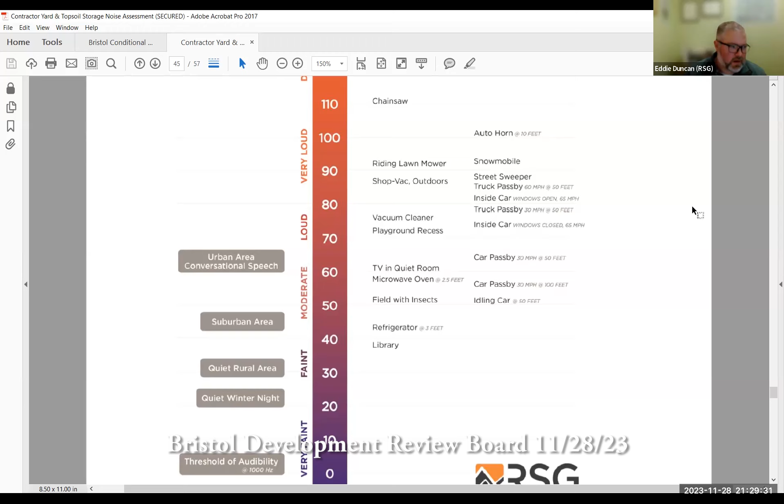So going back to the figure we were at, which was figure 15 on page 26, looking at the 40 decibel contour line running over the property line onto the neighbor's property north, that's man-made noise. That's approximately the same decibel level as the background noise, correct? Yes, it's approximately the same as the daytime background sound level over the course of a day. There again, there will be times where it will be higher, and times where background will be higher or lower.

But the man-made noise will be of a different character than the background noise, correct? It may or may not be. I would say it's likely that it would be of a different character, but it's also possible it would not be, and it depends on what is making up the background sound level at that time.

And as a certified acoustical engineer, you have the ability to study the character of the background noise, correct? Well, I'd want to hear your definition of character, but we are able to look at whether a source is biogenic, geophonic, or anthropogenic, and we can look at the different frequency content. If those are the elements you mean by character, then yes.

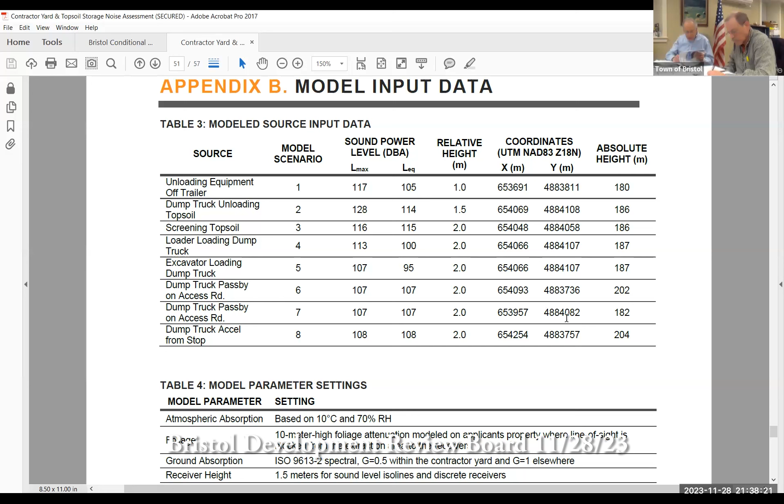Well, both can be used to load material into the dump truck. I think while we were at the site, because either could be used, we monitored either or both and decided to model both as well. I think you could ask the applicant what is typically used, but I suspect they would want the ability to do both or either occasionally.

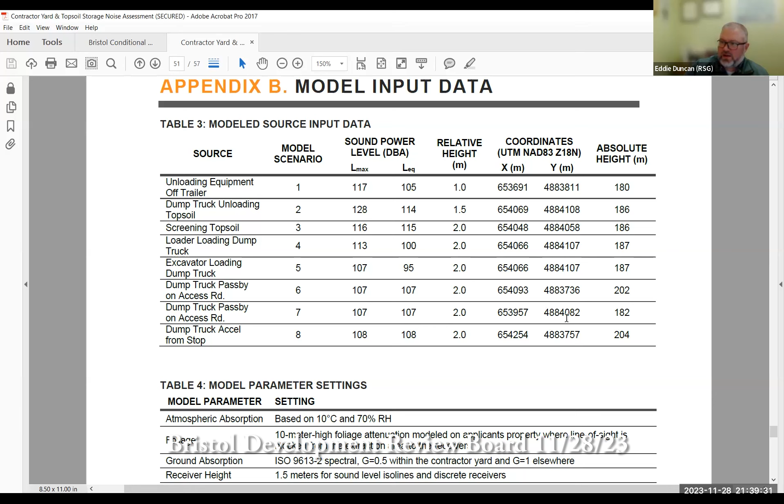Can you describe to us lay people the difference between a loader and an excavator? A loader has a bucket that drives into the dirt, lifts it up, turns towards the truck, and dumps it out in a forward motion. The excavator is like the backhoe shown on the cover of this report. It scoops the dirt towards the excavator, lifts it up, rotates, and dumps it by turning the bucket away from the excavator. Both methods dump dirt into a truck. It's just whether you're dumping it forwards or backwards, scooping towards the vehicle or scooping away from the vehicle.

Okay, now thank you. Before you go - Josh, bucket size is going to differ though, right? Bucket size on the loader versus bucket size on the excavator you used - how so? They're both different yardages. The ones we were using here for the studies - that excavator bucket is maybe a yard, shy of a yard. The loader bucket is about 3 yards, looking at that picture. I was guessing the loader bucket would be a lot bigger - three of those.

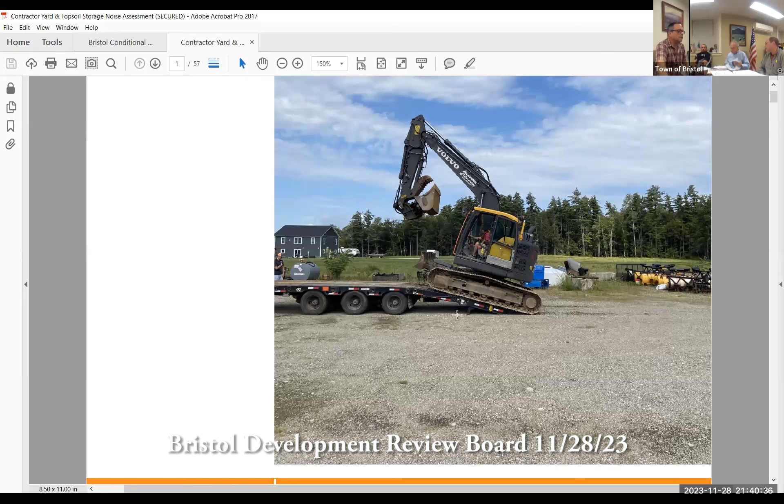So back to page 10, table 1, summary of background sound levels. The first column is LEQ, we've been discussing that. The second column is L90.

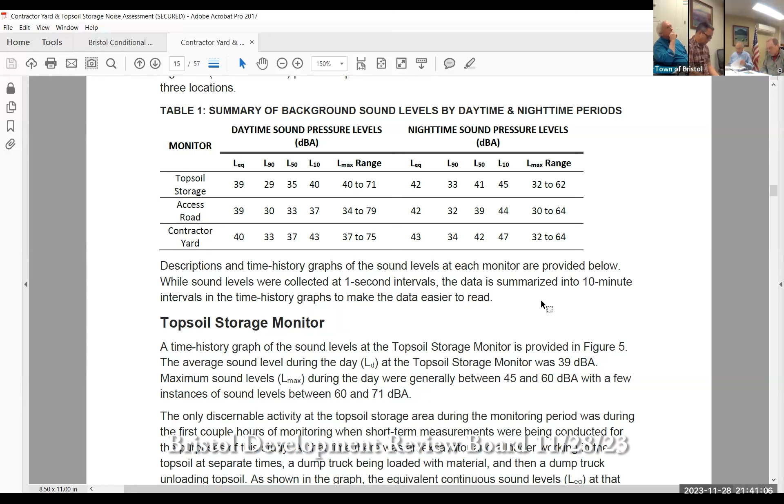And now I'm going to refer everybody to page 44, because the caption reads percentile sounds, LN. The second paragraph says L90 is often a good representation of the quote ambient sound unquote in an area. So what we saw on page 10, the values of 29, 30, and 33 - those were a good representation of the ambient sound in the area, correct? Yes, and by ambient, that is the sound that is happening when nothing else is - there is no biogenic sound, no wind in the trees, no distant or nearby aircraft, no distant or nearby vehicle.

It's the quietest 10% of the time, right? It is the quietest 10% of the time. Did your modeling predict the L90 when the Masterson operation is underway? No, it did not. So we don't have a before and after comparison of L90, do we? Well, the ambient sound level when the Masterson operation is occurring would be similar to the LEQ. The sound levels are not changing - like a screener operating at 41 is operating pretty consistently at 41. It's not dropping down to 30 and back up to 45. It's a fairly consistent source, so for a lot of the sources it would be similar to the LEQ.

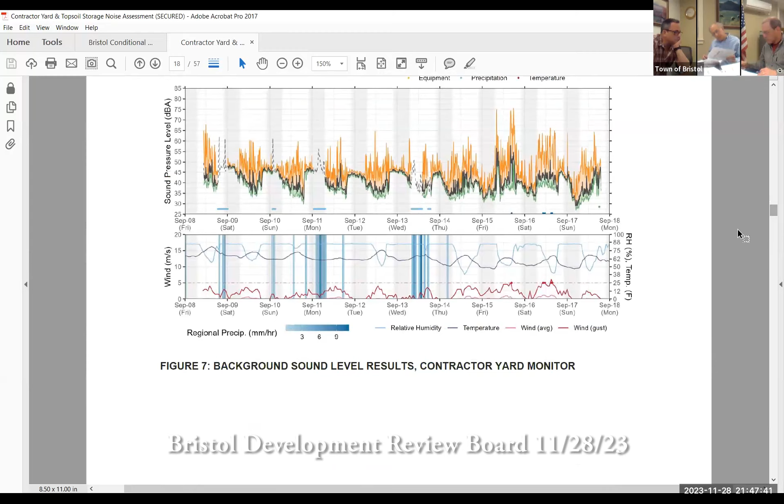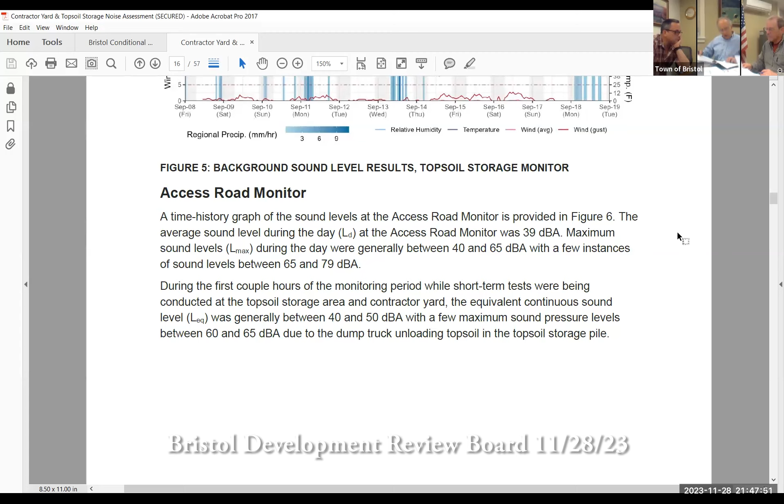Let's briefly go back to figures 5, 6, and 7, pages 11, 12, and 13. Which one would you prefer to have on the screen? All three. I can't do all three. Right, just do one. How about we do the first one, Figure 5. Perfect.

Are you with us, Eddie, on figure 5? Yes. Figure 5 shows us, among other things, what LMAX is at different times of the day, correct? Yes, that's correct. And this is background LMAX at different times of the day, correct? Yes, it's background except for the very first portion of the graph. The first hour or so is during testing that we talked about previously. Right. So when the LMAX from the project is elevated, if that occurs during times of the day when the existing LMAX is low...

Then the project LMAX will stand out above, will be unmistakable as a loud noise for the community, correct? Well, it depends on where it is. I wouldn't necessarily say it's a loud noise, but if it is higher than the existing sound levels, whether it's the LMAX or the LEQ, then it would stand out above those levels. And looking at exhibit figure 5, there are times of the day when the LMAX is not louder than the LMAX of a field with insects in it, correct? Which is in the low 50s. That's right. So during the day, the LMAX generally is between 45 and 60. But it varies every second.

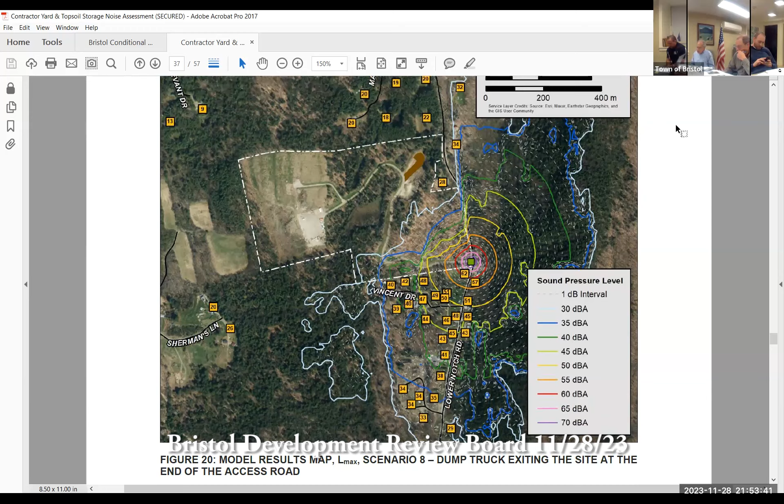That's in appendix C. That's Ekrus, or Ekroos. She says, I live right beside the road, and my house is built into the hill beside the road. My house literally shakes when large heavy trucks go by. Plates that hang on the wall, sconces on lights and windows make noises when the trucks go by. She continues, it was not as much of a problem until the year MDP began transporting his vehicles on the road, and Lathrop began transporting log trucks, sometimes tandems.

Do you think her situation will get better, stay the same, or get worse if this project goes forward? Well, we can't go north with our vehicles, period. So Josh is saying he can't go north with his vehicles, period. So that would include not just loaded trucks, but dump trucks. She's complaining about dump trucks, big trucks, town trucks, Lathrop's log trucks - not a pickup. The proposal is to only have vehicles go south on the road. She's not complaining about that, so we are not asking to go north past her house with a dump truck, empty or full.

Your contractors will all be instructed that they have to approach from the south. Yeah, I've already instructed that. She continues, I live almost a half a mile away from the site and hear a large booming sound. I've been told that the sound is the tailgate of a large dump truck dropping.

Does that make sense to you, what she testified to? I understand the text that you're reading, but I can't speak to her experience. I don't know what it is that she is hearing.

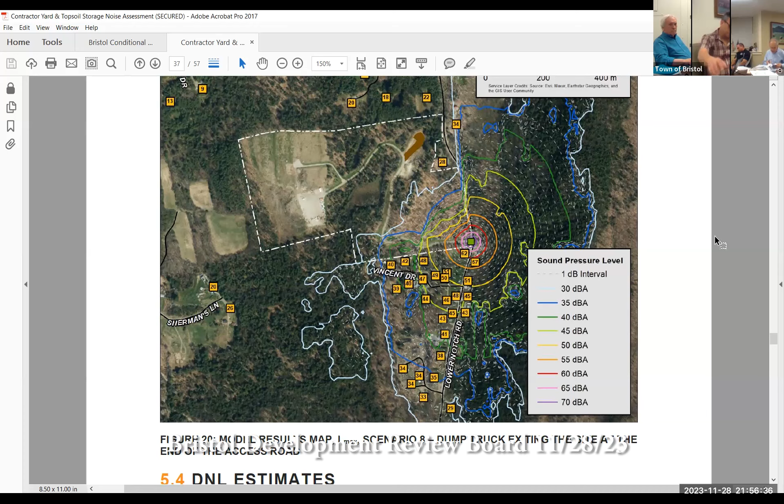I'd like to talk to you about DNL now, which you discussed earlier this evening, and it's discussed on page 33 of your report - part of it's on 32, part on 33. Let's look at 33. Would you like the top half or the bottom? I'm limited on what I can do. There you go, that's good. Perfect.

Just so everybody understands what you said earlier this evening, the DNL is a yearly average, correct? That's right, it's an annual DNL, an annualized DNL. So it takes the noise data for 365 days, including the nights, and weights noise in the night more heavily, and then gives an average, correct?

That's correct. So if I were to shoot a cannon off every day, twice a day, what impact would that have on the DNL? It depends on the sound level of the cannon, but it would have an effect. It would be a very small effect, wouldn't it? It depends on the sound level. If the cannon is 140 decibels, even small amounts like twice a day could have an effect on the DNL. If the cannon is far away and only 70 decibels, then it would have a small effect, because we're taking a short-term noise once or twice a day and fitting it into an average of 24 hours a day, 365 days a year, right?

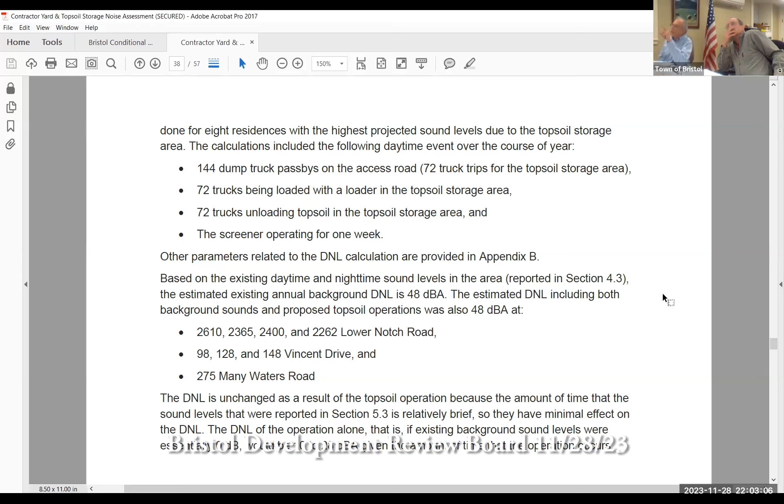Okay, so the 55 decibels on the neighbor's property, you only inputted 72 times a year? Yes, 72 times per year for a period - well, the length of time it takes to load a truck, which is on the order of 5 minutes or so.

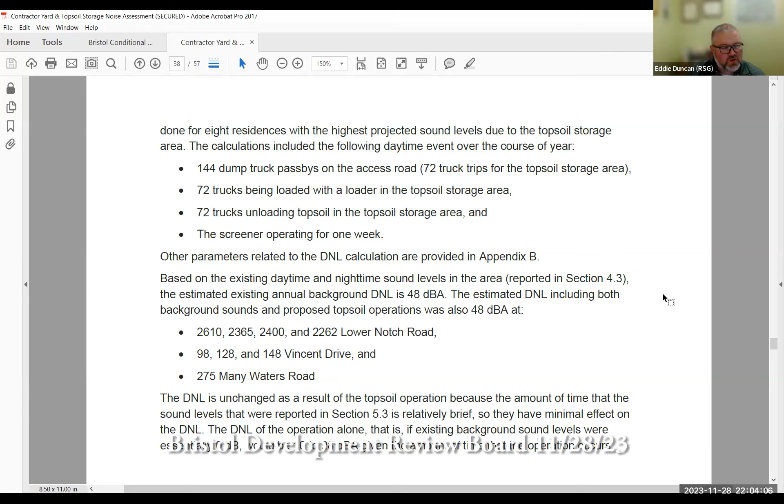Finally, I want to see if I understood your answer to Mr. Moyer's question. What is the length and height of the berm that you built into your model? The height of the berm is 12 feet and the length is approximately 260 feet long. It's shown in figure 21 on page 35. And it's not a straight line - it goes to the north and to the east of the topsoil storage area.

Great, thank you, sorry to keep you so late at the office. That's okay. Does the board have any other questions for Ed? Mr. Duncan, Eddie? Okay. Applicant have anything further?

All right, let's talk process, Bryn. Do you want to submit some sort of written argument? I don't want to close the hearing and start the clock. Right, so we wanted - what do you want, 2 weeks, 3, what do you want?

I don't want to have to reconvene the hearing just to accept that, but if we come up with a filing deadline and agree by stipulation that the hearing is not closed until those are received, we'll be on the clock and schedule a deliberative session, because we're gonna have to bring the board back together. That makes sense. What do you think?

So I already submitted a letter with my argument that this doesn't qualify as a business yard. And if you agree with that, much of what you talked about today, you don't need to answer because it doesn't qualify. So I will summarize that, but I really need to propose findings to you on all the other issues as well.

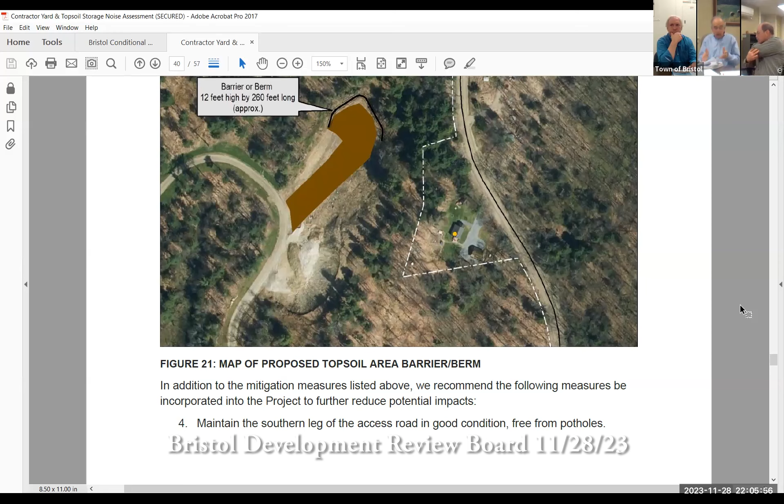I'm thinking 2 weeks, and you may or may not want to address these actual reports. Yes, I will. So what do you think? I would normally say 2 weeks, but I have a 2-day trial next week and another trial the week after, so I need 3 weeks. You're just as horrible as I am at predicting how quickly you'll get it done. And I'm thinking that 3 weeks puts us pretty much into Christmas.

See, today is... 3 weeks from today, let me just look at my calendar. He's got it, Chris has got it.

Mr. Chairman, while he's looking at his calendar, it occurs to me that the applicant could stand to create a little clarity in its application, because we heard some things tonight with respect to the actual number of vehicles. Also, the berm has been added in this report and is part of the calculations, but it's not in the site plan. So I think we should suggest that the applicant think about all of the different testimony and make sure we know what exactly they're proposing. That's a good point.

We can use the same deadline. I think we have a good idea, but clarification would be helpful, so that we know exactly what it is they're proposing, because it's evolved a little bit, and I appreciate that they've evolved it partly in response to issues that have been raised. But I think we should know exactly what they'd like, what they're proposing. What's the date?

You generally meet on Tuesdays, right? First Tuesday, second Tuesday, and fourth Tuesday if we meet. Okay, so if you meet, well the fourth Tuesday is the 26th. I hope you're not meeting on the 26th. I won't, I won't be here. Yeah, I could get you what I have to file by the 19th or the 18th.